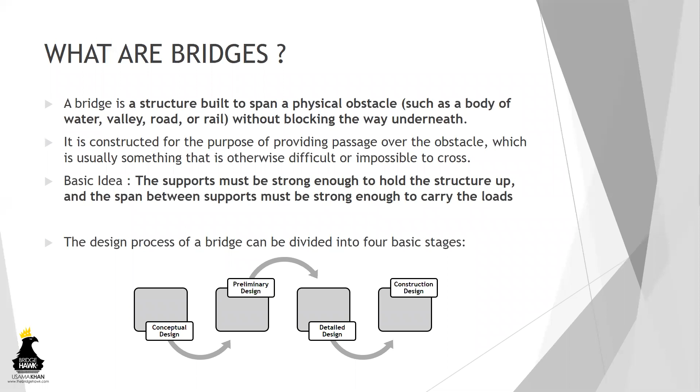So moving forward, we have different types of bridges. It depends upon the client what type of bridge or what type of structure is required—maybe some projects might have an aesthetic appeal, and some of them might not. So based on what the problem statement is or what sort of problem is supposed to be solved, the bridge type is decided, and this is completely decided by the client or the government authority, whoever is in charge of the project. So these are a few types of bridges.

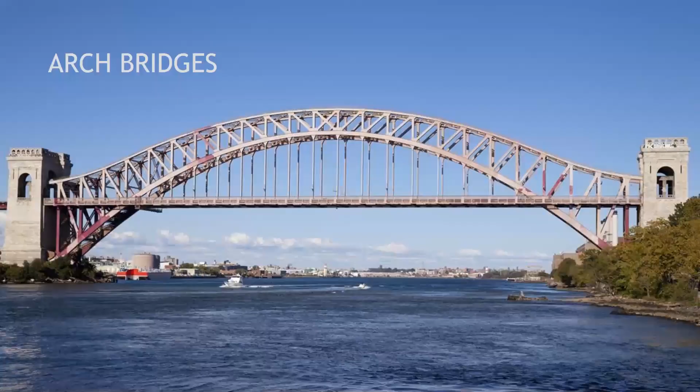We've got balanced cantilever bridges, trunnion bridges, which will open for the passage of boats below. We also have tied arch bridges, which is based on the principle of an arch which is stressed. We've got arch bridges in a similar way, made up of a steel truss with anchors at both ends.

Extradosed bridges, which are somewhat similar to cable stayed bridges, but the only thing is that the pylon is not as long as cable stayed bridges. The girder is mostly a part of the structure; the pylon is mostly a part of the girder. Masonry bridges, which are obsolete now. Steel truss bridges.

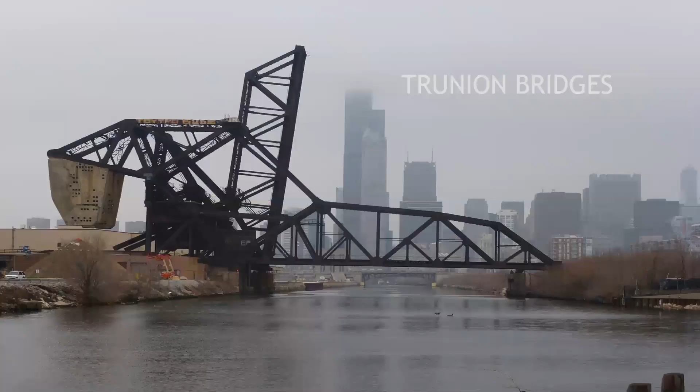Trunnion bridges - this is a rather unique style and design of a bridge. Over here, you can see the counterweight. So the basic principle is that you bring the CG of the bridge from here to over here. So when we do this, the bridge will lift up. I think even this is no more in use - it's also obsolete.

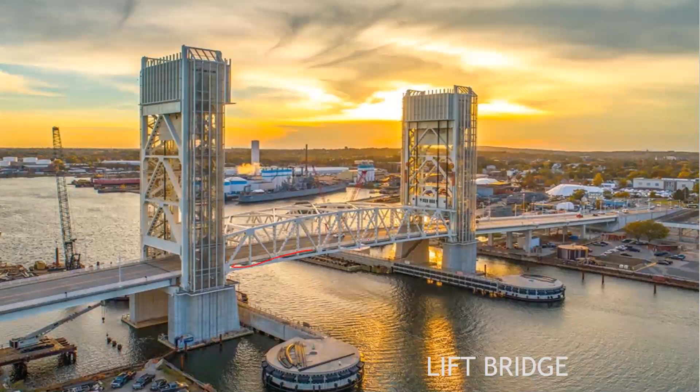A special kind of bridge with mechanical augmentation, like a lift bridge. It will basically lift up the central span. Over here is the machine assembly.

And finally, we'll come to the beam bridge. For a larger part of my webinar, I'll be speaking upon beam bridges. Why? Because this is one of the most common types of bridges and the easiest to install. Especially in an urban environment, it is highly preferred that the traffic is not stopped, and we have an easy installation of the bridge and a successful launch of the girder.

All right, so beam bridges are the simplest and most inexpensive kind of bridge. And as the name suggests, it is a simply supported beam. We've all designed simply supported beams in our RCC subjects in engineering. So basically the force is going to create compression on top and tension at the bottom. In the same way, we'll have to design tendons and make the beam resist tension on this principle.

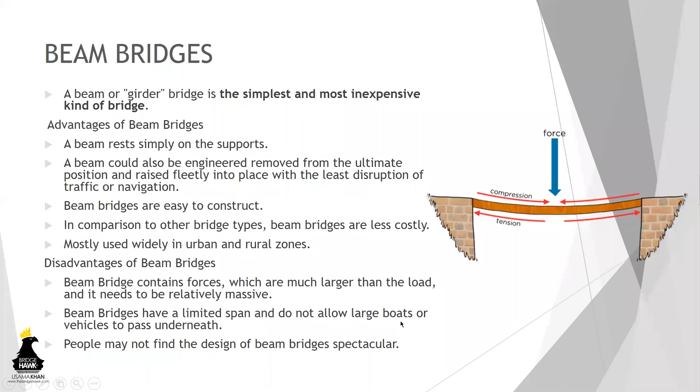So basically these are very easy to construct and they're widely used in urban and rural zones. The only disadvantage is that when we have large spans, if the span is too long, the depth of the beam might be higher. In that case, maybe you'll have to go for a different kind of girder. And people might not find this beam to be very aesthetically spectacular - it looks quite mundane, if I may. Something like this.

So now coming to our main topic, metros. So what are metros? Basically they're called MRTs, which is urban mass rapid transit systems. These are elevated railway transit systems with the tracks supported above the street level on a viaduct superstructure or any other elevated structure.

So the materials used to make these viaducts are usually either steel, concrete, prefabricated members, post-tension concrete, or a mixture of more than one material. Maybe the girder might be of steel and the deck slab would be concrete. In most cases, if you are using a steel I-section plate girder, you'll have a concrete deck. So in that way, this would become a composite bridge - this would be categorized as a composite bridge. In our further slides, we've got some design philosophy which will deal with composite bridges also.

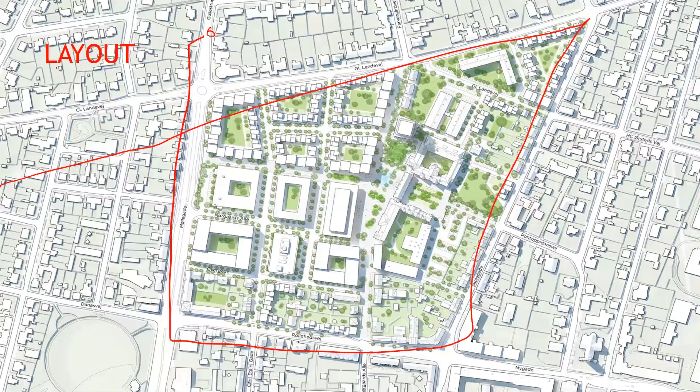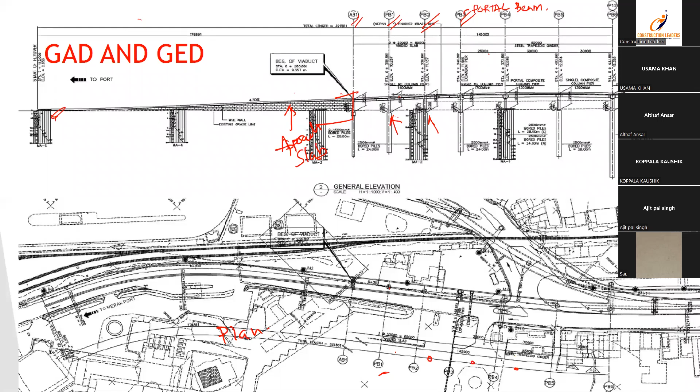So over here, what we see is that between pier PB3 and PB4, you've got a distance of 25,000 millimeters. Over here, we've got 30,000 millimeters of distance. Similarly, over here, we've got 3,000. This is showing the direction of exactly where it is going.

So in order for us to understand exactly what sort of foundation we should use for these piers, we should have a very resolved idea of what is the ground condition. What does the ground look like? What is the safe bearing capacity? Where is the water table? Where is the rock? So these details need to be at hand.

The most important thing in determining this is exactly what is the safe bearing capacity of the soil and what is the rock. For example, if we've got a rock starting directly over here, and this is the ground level, we can think of having an open foundation. But if the rock is well below and this is all sandy gravel, we'll have to go for a pile foundation, and even maybe have inclined piles.

Okay, so over here you can see this is a layout, the general layout of the project in a city. So as I said, the type of bridge, the type of pier, the type of girder, everything has to be specified by the client.

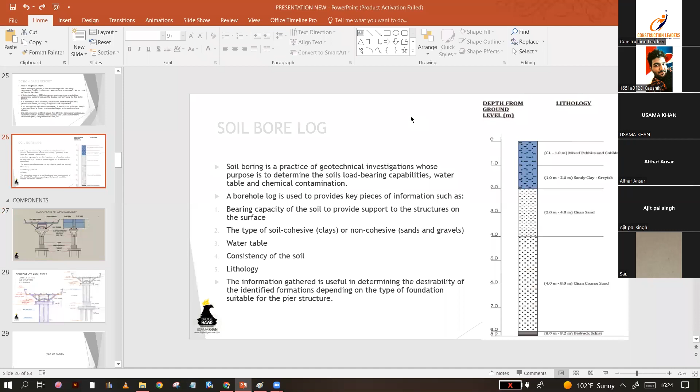So what this basically tells us, for example, if this is a bore log for location PB3, I've taken it from over here, let us say this location. As of now, we are trying to design this pier, so we need to know the exact conditions below it.

So what we'll do is go to the soil bore log. Basically, this log tells us that just below PB3, the ground up till 1 meter is mixed pebbles. After that, for another 1 meter, we have sandy clay. Then for 2 more meters, we have clean sand, and below that it is all coarse sand.

This gives us an idea of what the safe bearing capacity would be. There will be many columns, but one of them would be SBC, telling us what is the SBC and what is the design SBC. They might tell us, for example, at this location use SBC 250. This would be a third party concern.

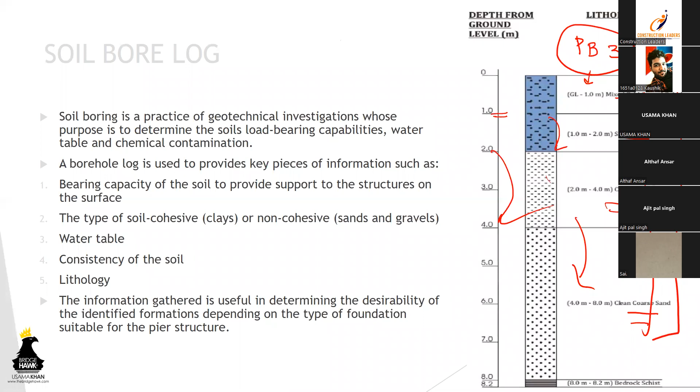We as structural engineers are not required to go into lithology. This will be done by a third party and given to us directly. This enables us to design foundations, and even for an open foundation it is very important. SBC helps us understand the strength of the soil below, the bearing capacity of the soil.

Moving further, this is a typical sketch, or typical elevation, of what a metro viaduct looks like, with different parts indicated. This is the transverse side, this is the transverse section, and this is the longitudinal section. Over here, what we have used is a multi-celled box girder.

This has actually been taken from a live project, so for obvious reasons I cannot share the drawing with you, so I've made a sketch instead. Coming from bottom to top, we have used pile foundations. In order for the load to be distributed properly, we'll have to use a pile cap. Just below the piers, we'll have a crash barrier.

What is the role of the crash barrier? Excuse me sir, good evening sir. Is this the better option, this multiple box girder versus single cell? Which is more, because normally in construction it is said that a single cell is more compatible and easier to construct, so that is just right, kindly.

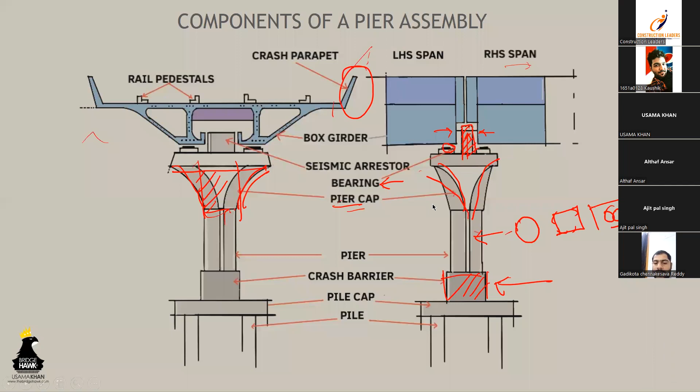This is the box girder, multi-cell. This is the left-hand side span and the right-hand side span. These are crash barriers or crash parapets. These are rail pedestals. In a moment, I'll also show you a 3D model so that it will be much more clear.

This is a bit more detailed sketch. One of the main concerns of a designer, when he's trying to design or transfer the forces to the bottommost part of this structural arrangement, is that he needs to know what are the different levels. So over here, I've marked all the important levels that you need to consider, and I'll let you know why these levels are important.

If you can see over here, this is clear, right? This is the top of pier. As I told you in the previous slide, the pier stops here - this is the pier cap, so this is the top of pier level. This is the centroid of the pier cap, you need to know this. Top of pier cap, top of the pedestal, and top of bearing.

Centroid of the girder - what is the level of the centroid of the girder? Because if you've got any moment, it is actually rotating about this centroid. Top of deck, top of rail - what is the rail? This is the rail upon which the axle load is going to be directly incident, so you need to know exactly what this level is.

And the center of bogie - bogie is the metro, you can say metro rail. So what is the centroid of this bogie? Apart from that, some of the other levels is like centroid of the vehicle. Why do we need a centroid of the vehicle?

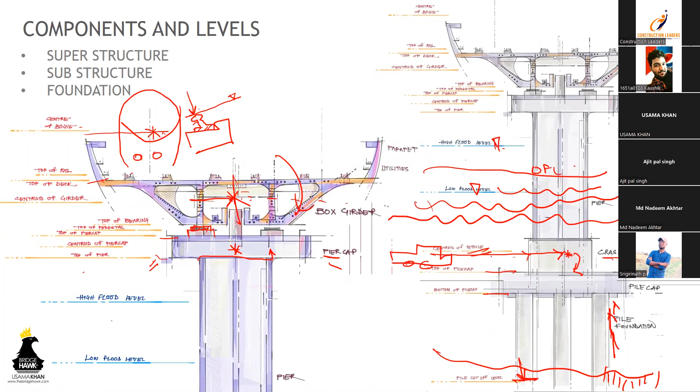If your structure happens to be in the vicinity of a water body, or it is assumed that in this zone there is a threat of excess rain, or it is anticipated that it is going to experience waterlogging, or there is a river beside it, then it is important to know the low flood level, the high flood level, and the ordinary flood level. But if you're designing structures which are not threatened by water, you don't need to consider this. We can have a dry analysis and don't have to consider a wet condition.

All right, so I'll show you a 3D model of a pier. This is a model that I created in Shapr3D. This very much indicates everything that you can have in a typical pier.

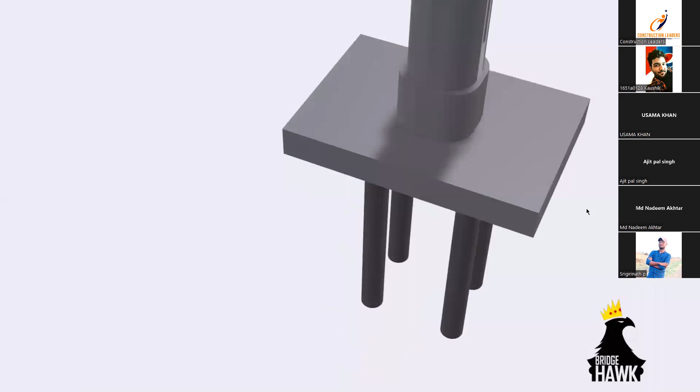As we just saw, the arrangement comprises piles, pile cap, crash barriers, and the pier cap. This is the pile and the pile cap. Coming up, it is a crash barrier. As of now, this is a circular section for the pier. Then the pier cap, and above it is the assembly for bearing. The red member that you see over there is the seismic arrestor. The holes that you see over there are holes for sleeves. These four holes are sleeves which are given in order for the launcher to fix itself.

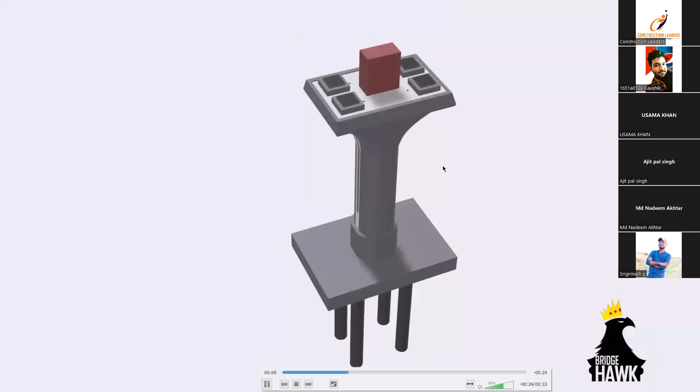So we can have different pier sections. As I said, it is completely the requirement of the client as to what type of pier he wants. In this site, the pier assembly that you see...

These are the piers that were typically used in many parts of Mumbai Metro and Pune Metro. If you see over here, this is a pier, the crash barrier, and a post-tension pier cap. Over here are the cables, if you can see - I'll show you in a moment. And these are U girders.

And we can have any number of variations, and we can have different shapes for piers, as long as you can structurally prove it, as long as you can structurally validate it.

So this pier over here - what you see is that the pier has been casted and the reinforcement has been left in order for this precast pier cap to be fixed upon it. So if you see over here, the pier is a separate entity. It has not been monolithically constructed. The bars have been left in order to achieve fixity between the pier cap and the pier. So this is the 3D model of the pier, and later on the pier cap has been lifted and simply placed upon it.

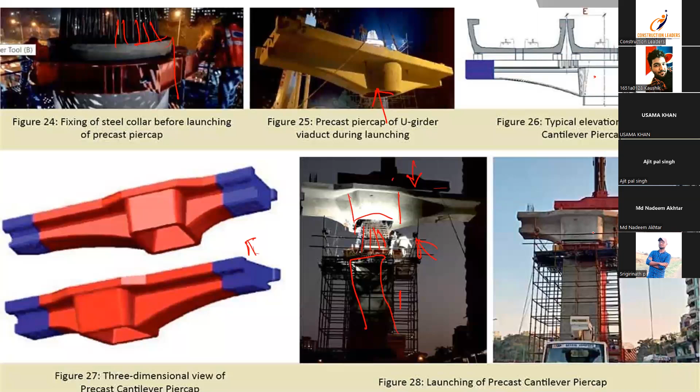So this is rather a unique case that we had encountered in Mumbai Metro and Pune Metro as well. What you see in front of me is a rather simplified sketch of what we did. We have two different types of girders - one is a box girder on the right-hand side, another is a batch of concrete I-section girders. They are both hosted upon the same pier cap, and this is a cantilever pier cap. By cantilever, I mean this portion is rather elongated, like it is under cantilever behavior. We've got different types of piers - RCC piers, piers with post-tension pier cap, hammerhead piers, cantilever piers, something like this, portal piers - I'll show you what that is - and coming down with station piers.

So basically, while we were designing this, I'll show you what we encountered as a challenge. If you see over here, this is a sketch that indicates a post-tension pier cap. I've taken a longitudinal section for this. Over here is the pier zone, indicated by the dotted line. After here, this zone is the cantilever zone, and as you saw over here, these two bearings, they are holding a box girder.

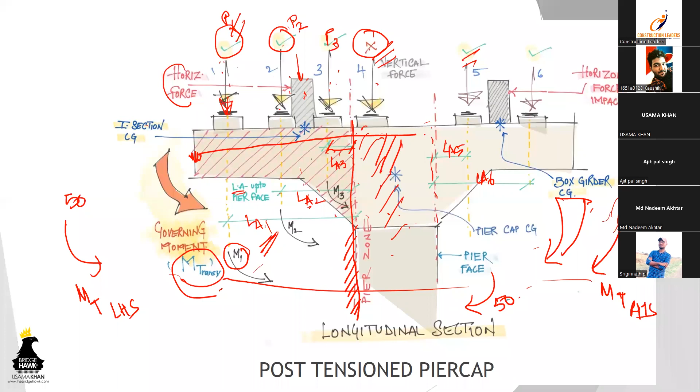So this is only the force. You can say it's sort of a force diagram, but since this is a cantilever pier cap, the extents of these are too long. So for that, we'll need to design it as a post-tensioned pier cap.

So this is the same pier cap. This is the stress arrangement, cable arrangement. If you see, what this typically is, is these are the cables for post-tensioning. These are the anchorages, I've just indicated them this way. These are the distances from the top.

You can say if I've taken a section from over here, or if I see this pier cap from over here, I'll look into this diagram. So talking about the profile first.

So this is the cable profile. If you see over here, we'll have a rather straight profile, and over here we'll have a parabolic curve. This is basically done in order to take care of the moment that is going to be generated.

That is why the eccentricity at the center point is more, over here it is less.

This would be the combined CG of the strands, all the strands. We've got many strands. Like for example, if you look at this diagram, we've got about 10 strands with an addition of 2. So what this typically means is the stages of stressing.

When we are stressing any structural member, it has to be done in stages. Why we use these kinds of construction stages, I'll discuss this when we are actually dealing with some detailed design.

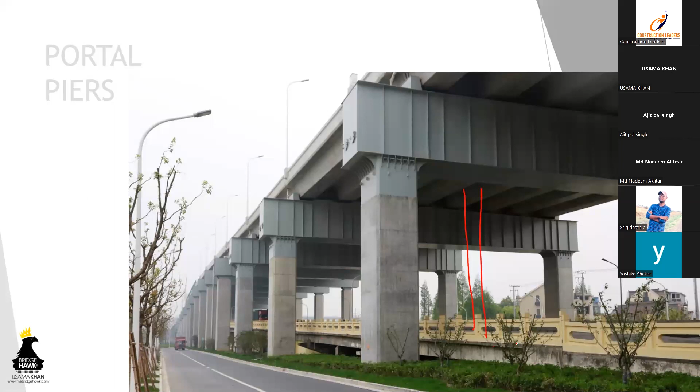Moving further, these are portal piers. We've encountered these a lot, and basically we use them when the distance between piers is not feasible for us to have a direct pier, because there's a different bridge here, so we have a limitation that we cannot have a direct pier. Hence we'll have a portal frame, typically a frame like this, and the girder would be over here.

And we can have different variations. For example, this is pier 1 and this is pier 2. You can have a variation like this, where pier 1 is deeper and pier 2 is much lighter, maybe because the rock is like this or something like that. We can have pile foundations for this pier, open foundation for this one, as well as a combination of girders. Over here we can have box girder, over here I-section girders, and we can have more than one box girder.

So it typically is based upon the layout and what is your requirement.

This is a sketch briefly indicating the different components of a portal pier. If you see over here, these are different sections. What is the section of the portal beam? If you cut it over here, you'll get a section like this - it's like a T-beam. This is a corbel section, which is actually hosting the bearing and the seismic arrestor, and subsequently the superstructure, the box girder and the pier section.

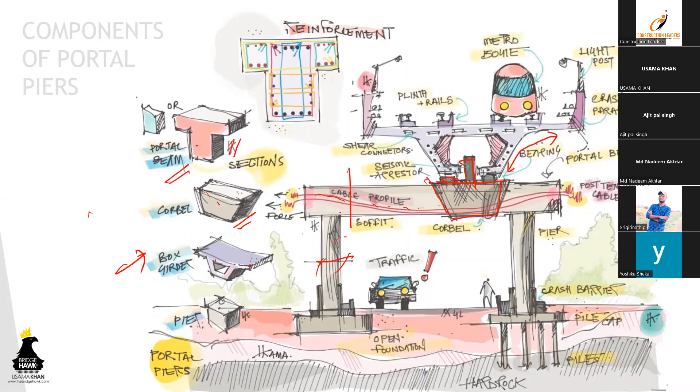Now coming to station piers, this is one of the most interesting elements of elevated metros. Why? Because the challenge exceeds a certain limit here, as station piers are supposed to have an aesthetic appeal, so an architectural consideration has to be made. Any station you've traveled through is comprised of many different piers - one station is supported by multiple piers. Maybe an entire station is supported by 8 station piers. When we designed Mumbai Metro, one station was supported on 10 different station piers.

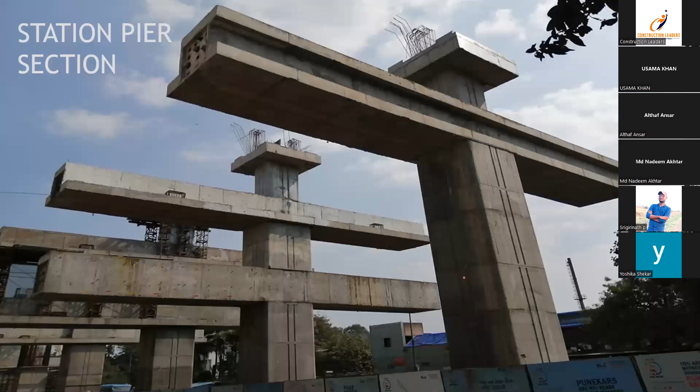So typically, this is your station pier. I'll show you the next slide. This is a station pier. These over here, what you see, are the concourse arms - these are cantilever arms which are stretching out from the pier. This is the pier, and this is the pier cap.

If you see over here, this just has got one level. Over here we've got number 1, number 2, and there's also one more level over here. So now, having seen this photo, it is easy for you to understand this pier in the context of the architectural drawing. So now this is your main pier, this being the first arm.

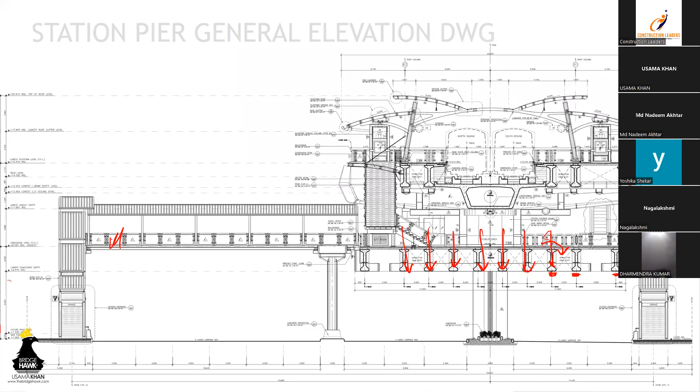These I-sections are placed upon bearings. All of these I-sections will be placed upon bearings. Whatever the moment and the loads, they are directly going to be transferred on the concourse arm by the bearing. So these are the bearings.

So now you've got point loads all on the bearings. As we had seen in the case of cantilever pier cap, with different lever arms, similarly we'll have different lever arms generating a higher magnitude of moment. The moment's lever arm will start from the face of the pier.

So we'll have different lever arms, like for example, we can say P1, P2, P3, and P4. Similarly, we'll have lever arm 4, 3, 2, and 1. So all of these point loads will generate a moment. This is level 1. On level 2, a similar case would follow. We'll have moments.

This would be an increasing magnitude, or it might also decrease. The lever arm is not the only concern, right? Of course, because if the lever arm is more, you'll have more moment.

But it is possible that the moment over here is 100, and it is possible that this would be 50. Why? Because it is not only a matter of lever arm - over here, maybe if we have some furniture or a machine like this, the SIDL load is more. So the point load itself is maybe 1000, and the lever arm is less.

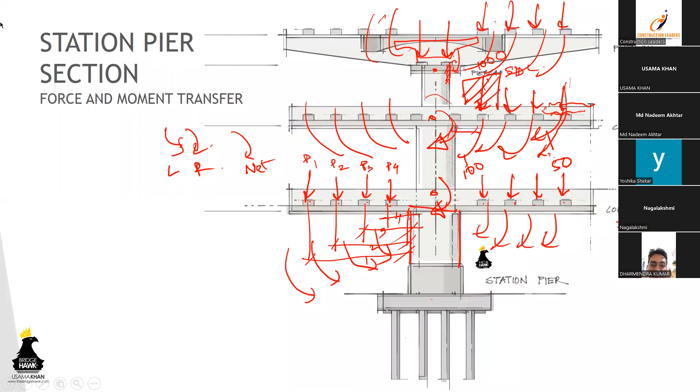So this is the design principle of pier caps—regardless of them being quite complicated, they're quite interesting. Having said this, if you see the number of components that actually define a station pier, there are too many, so all of them have to be designed separately. This entire pier has to be a separate design entity.

This is one design entity, this is the second design entity, the pier cap. The platform arm is a separate design entity. The concourse arm is a separate design entity. The second concourse arm is a separate design entity. The crash barrier, of course, is a separate design entity. The pile cap and the foundation is a separate design entity. All the bearing pedestals are a separate design entity.

It is possible that we'll just design one and apply this for the most critical case, and apply the same design for all of them. The bearing, of course, is a separate entity. The seismic arrestor is a separate entity. So you can see that there are too many design components that actually go into creating the actual submission for a design for a station pier.

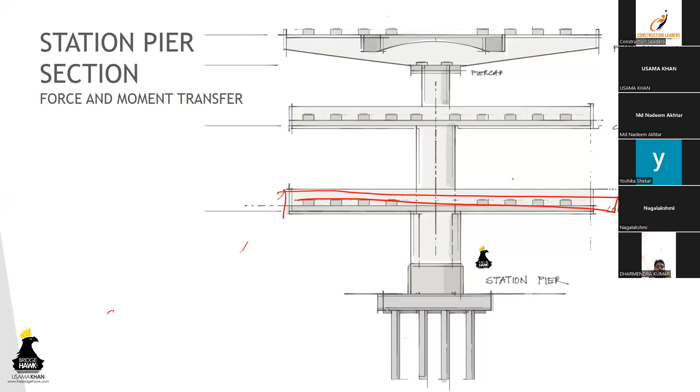This is the moment. As also, if you would observe something—over here, if you see, there is a section like an inverted T-beam, and we have got bearings on this side as well as on this side. So both of the sides have got bearings.

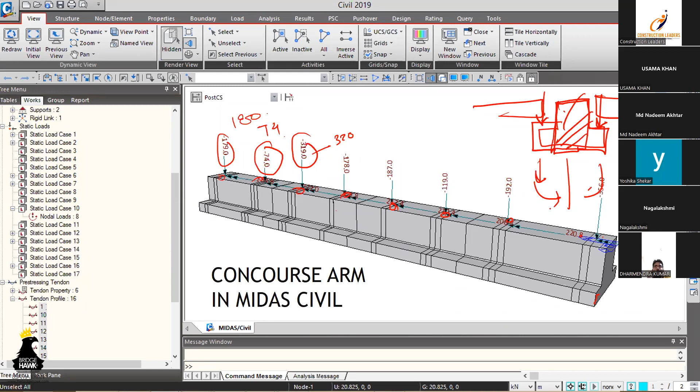So basically we're talking about something like a corbel. This is a rectangular beam, treated as a rectangular beam with protruding cantilevers. The point load is incident on both sides, because we've got a girder on this side and a girder on this side. So using the same principle, we use the net moment and design for it—that's why it's been resolved into the center point. It's just a simple 2D model to which I have assigned the section of an inverted T-beam.

This is a concourse arm, and as you saw in the previous slides, these are post-tension cables over here. These cables have to be represented in the software model. So this is the cable profile, and as you can see at the center, the eccentricity is more. This is the cable anchorage block, which you saw in the picture.

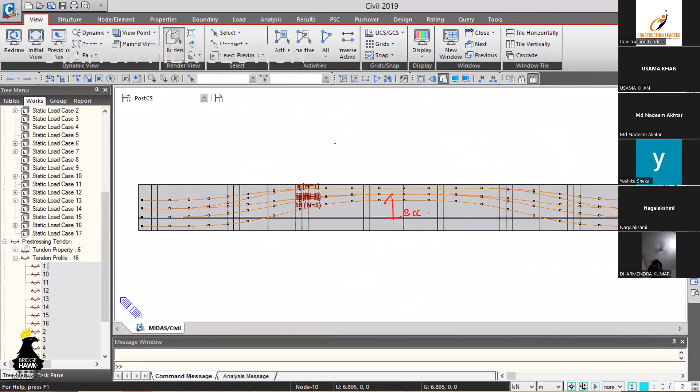There's an interesting procedure to this—if we resolve this into X and Y axis, and the Z axis, for now I'm taking Z as this. So what you've got to do is, all these points that you see are the curve points. We are defining an array of points—rather, we define only half of it and then mirror it. All these points have a different coordinate in X, Y, and Z. So every single point, when we're defining a strand, has to have an X, Y, and Z coordinate. And when we have this, we have an inbuilt command for defining strands. So once we put all those coordinates and mirror it, we can have it this way.

All right, so this was about concrete concourse arms. If you are interested in this, we can have a separate session on the design of these amazing cantilever members.

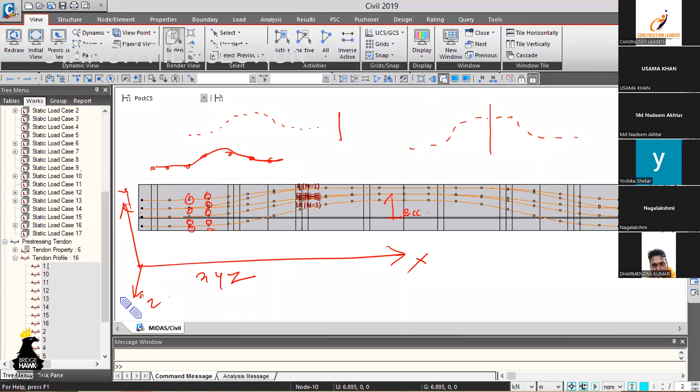Moving on, bridge girders. What are the types of girders that we actually encounter? We've got I-section girders, box girders, single-celled and multi-celled, U-girders, steel plate girders, truss girders, and composite girders. We'll be dealing more with the box girders and I-section girders.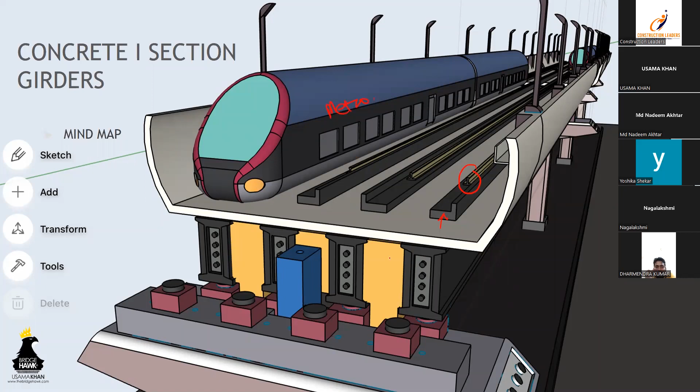This is the model that I made, representing a complete structural arrangement. These are the rail plinths, the rails, the metro bogie, and these are concrete I-section girders. And the bearings, the bearing pedestals, the sleeves, and of course, the post-tension cables. We also see a hole over here, that is for drainage purpose.

We'll have a slight cross slope to this deck, so whenever we've got rain or any other discharge, it will directly go over here to a pipe, and the pipe goes way beyond, way below, from inside the pier.

So typically this is a typical I-section girder. This is most common, as we have discussed. Most common, can be placed by a crane, very easy to construct. It can be constructed on the site or in the warehouse and brought via a truck.

This is a cable anchorage block arrangement. You see over here, these things are actually cable anchorage blocks. These are 7-wire strands - one strand is comprised of 7 wires. This is useful in stressing.

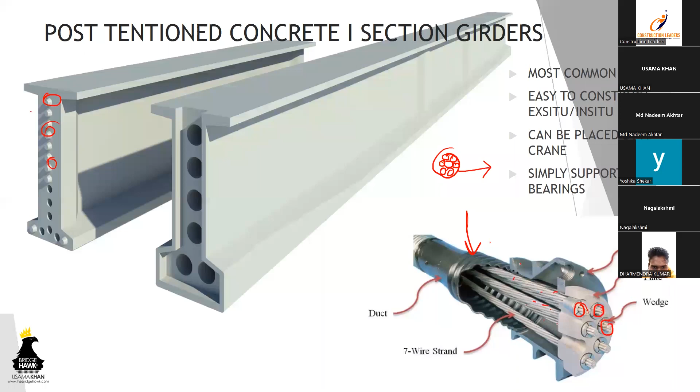Coming to the next type of girder, which are box girders. I'll show you a 3D model for a box girder. This is a model that I made in Revit.

This is typically a multi-celled box girder. You can see the level of detail, and you can see what are the different components that comprise a box girder member. There are three different cells to the girder, and the protrusions that you see over here, these are the shear keys. When two different pieces or segments are placed and joined, shear keys will prevent the horizontal or lateral displacement between the two pieces.

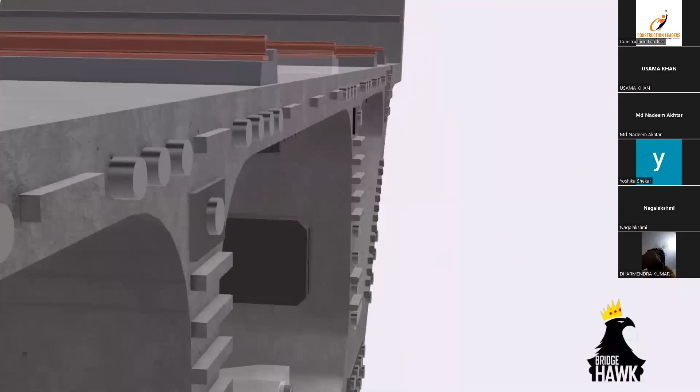I don't know why it is so distorted. All right, the notch that you see over here is supposed to accommodate the seismic arrestor - more on that when we talk about loads. And this over here is the blister.

It is a bit distorted. These are rail plinths, and these are the rails. How we take the loads, I'll discuss in the load section.

So this was the model that we saw. Talking about the different components of a box girder, if you see over here, I've only taken half of the box girder. This we saw over here, this was the rail plinth, the rails upon which the bogie is going to come. These were the blisters. Over here is the anchorage block.

These are different cable anchorage blocks. Over here, the shear keys. Again, these are the main cables. The blister, the box girder, the web of which is resting upon the bearing.

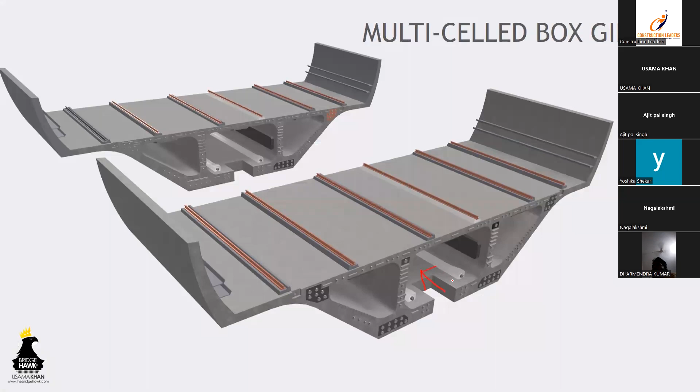Also, this part is called the top flange, and this is the bottom flange. This is the internal web. These are the diaphragms. And this, as I told you, this is a seismic arrestor. The seismic arrestor basically comes over here in the notch.

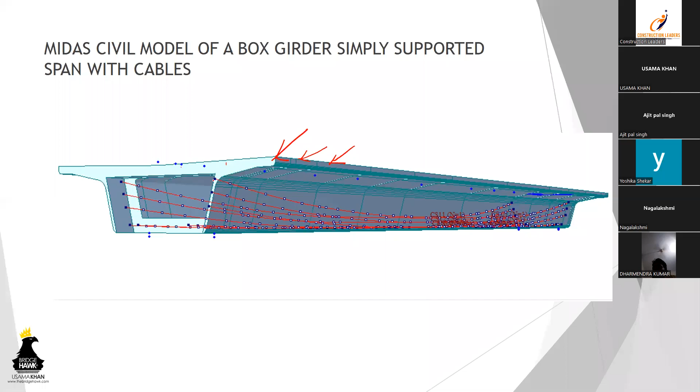More on that if we have a detailed lecture on design of box girders. This is a typical box girder formwork. Usually what happens is the box girder gets casted on a yard and then it gets brought up to the site.

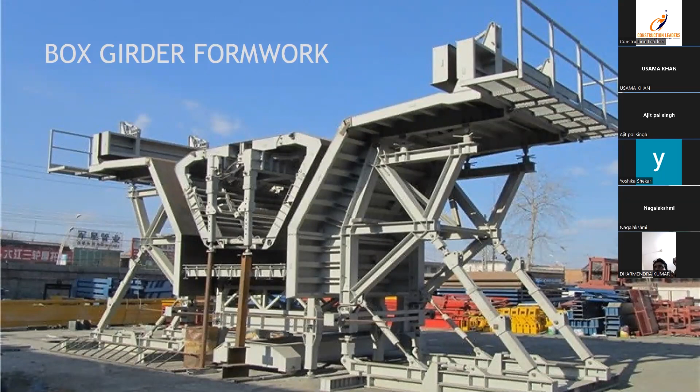I'll show you a video, so that would help you understand it better.

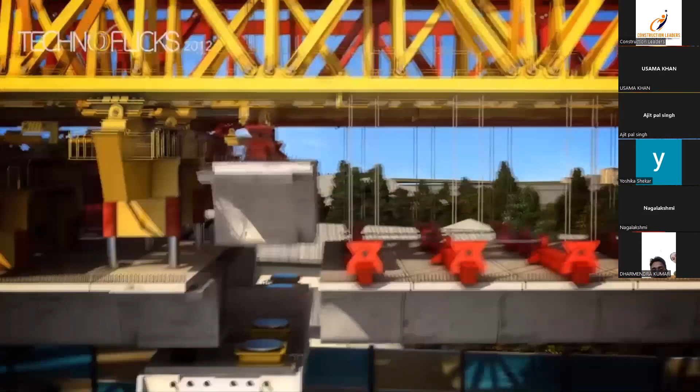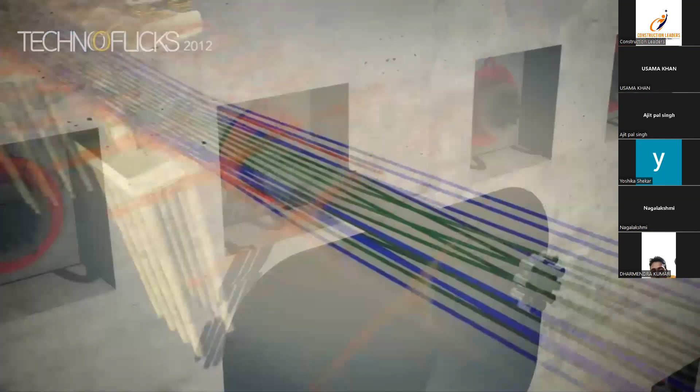So that was segmental launching. As I told you, when we are considering design, we need to simulate every condition that a structural member can experience. Segmental launching involves the crossing over, or passing over, of a very, very big machine. This launcher carries huge loads.

The loads from these launchers have to be represented by means of a load case. If you can see over here, the entire load is directed on these three legs - you can say the front support leg - and there's a separate launcher case which is highly critical when we are designing pier caps.

When a launcher is at this stage - let's say I name this stage as stage 1 - at this stage the launcher only represents its own dead load. There are no external loads to it, but at this stage it also represents the dead load of the entire span. So this launcher load case has to be

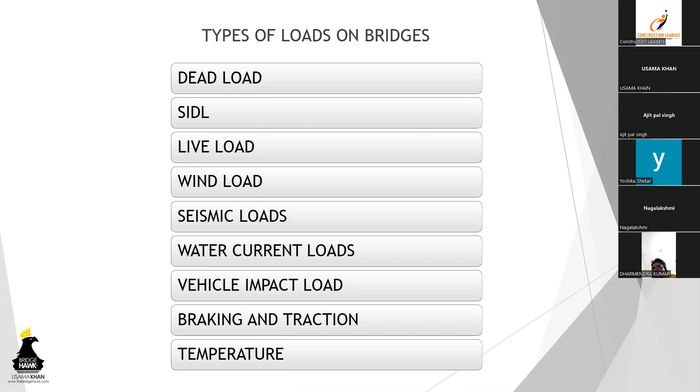So starting off with dead loads. Dead loads are basically the category of loads wherein the self-weight is to be multiplied and transferred to the substructure. So they are a permanent category of loads. They have to endure this for the entirety of their service life.

The self-weight of the structure is usually calculated by the software which you are using. If you want to be sure of your results, you can also have a manual calculation done simultaneously.

It is not always the case that you'll have equal spans on both sides. If you see the sketch, you have span 1 which is 20 meters and span 2 which is 30 meters. So obviously the loads - if this is the top view, let us assume we've got 4 bearings - if it is 100, maybe this is 50 and this is 50 from the right hand side. And when this is 50, then it will be 25 and 25. So depending upon the spans on either side, right hand side and left hand side, you will have the dead load values changing every time.

So it depends mainly upon the type, number and section geometry of the girders, span length. As I said, type - you can have a case wherein over here we've got I-section girders and over here we've got box girders. So even if you have such an arrangement, maybe you've got 4 or 5 I-section girders, and over here just one single box girder. So even if this is 20 meters, maybe this will have more load - maybe 500, or maybe only 200. So it is not only about the span, it is also about the type of girders, the number, and the section geometry.

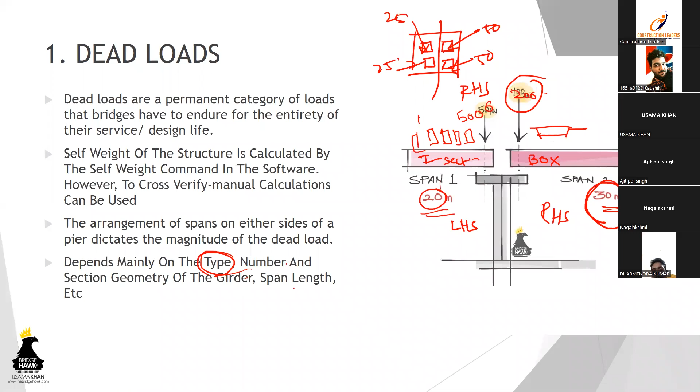Superimposed dead loads - as I said, the DBR, the design basis report, has to specify what is the superimposed dead load incident upon the span. That includes long welded rail pads, fasteners, parapet wall, OHE masts, like in one of the models you saw which had street lights, solar panels if we have a provision for them, cable trays, plinth loading, and others. This has to be specified by the DBR.

So this is a typical picture - this is one of the Dubai Metro stations. If you see on the track, it is not only a plain deck. Over here we've got rails, plinths, some utilities, and some railings. If we've got a street light over here, it has to be represented as a load. And if you've got conduits like this running, you have to have all of them included in the SIDL load case.

So this is the long welded rail - the railway. For example, if you have a case where this is track 1 and this is track 2, but over here you've got a merging track, the concrete plinth which is going has to merge into a second track. So how will you take the SIDL load case for that?

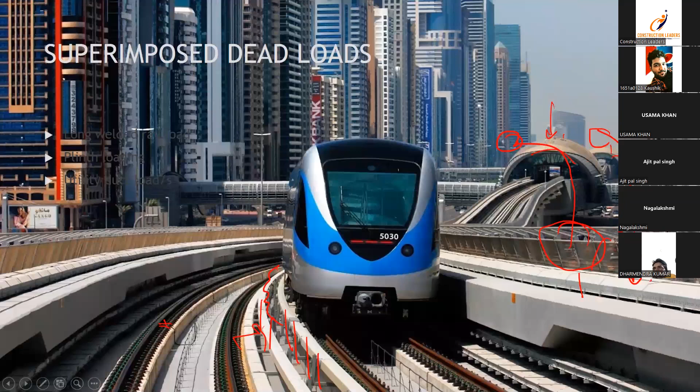This is a representation of that - the red block indicates a curved track, and the gray block indicates a straight track. So when it is merging like this, at one point, at the midpoint, you can say it will almost be like one single plinth.

Why I'm showing you this is because if you have to simulate exact conditions, you need to know, for example, if one single block weighs 10 kilonewtons, just as an example. Over here we've got only the dead loads, which is 10 plus 10, but at this juncture we have only got 10. Maybe it will have some extension, so maybe it will be 12, not 20. This has to be represented. We cannot risk having excess loads without any reason, so because we need a proper simulation, this should be simulated.

So over here, if you see, there's one protruding element. Over here it is not. So maybe over here it is 10, but maybe it is only 7 over here. It depends upon what level of detail you want in your model.

All right, so live loads. Live loads are basically the bogie loads or the axle loads that must be specified by the DBR. The design basis should also tell you what is the axle load, what is the loading that you have to be designing the structure for. Over here, this is a typical metro bogie that I've indicated. These are the axle loads, 16 ton per axle. So in the top view, one of the wheels is 8 tons, the other wheel is exerting a load of 8 tons. All these tonnage values have to be specified by the DBR.

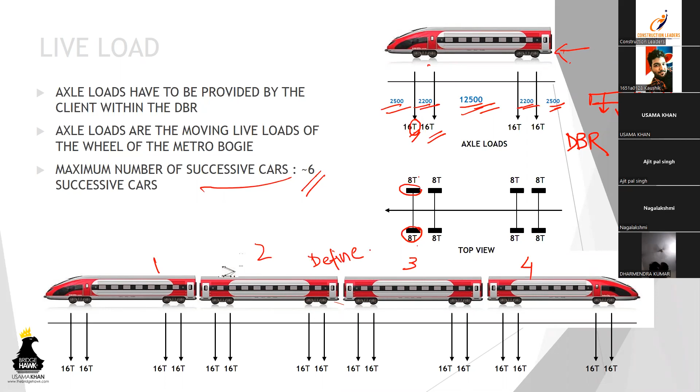All right, I'll show you a small animation of live loads. This is a typical elevation for a pier and span arrangement, girder arrangement. This is span 1, this is span 2, and we are assuming we have got only 2 tracks. When we have got only 2 tracks, what are the possible number of variations of live load that we should consider? Over here I've mentioned 8 tons, but this is only for one side, so it is actually 16 tons per axle.

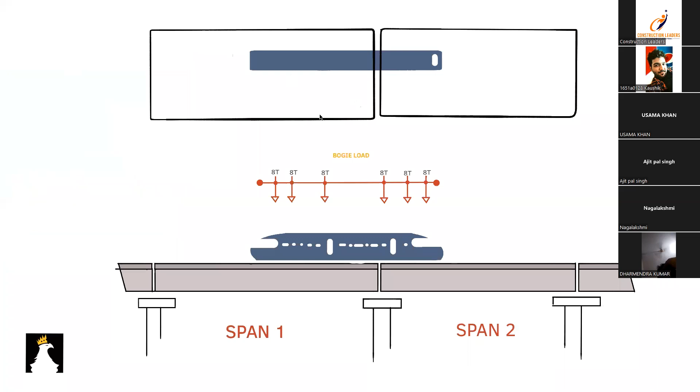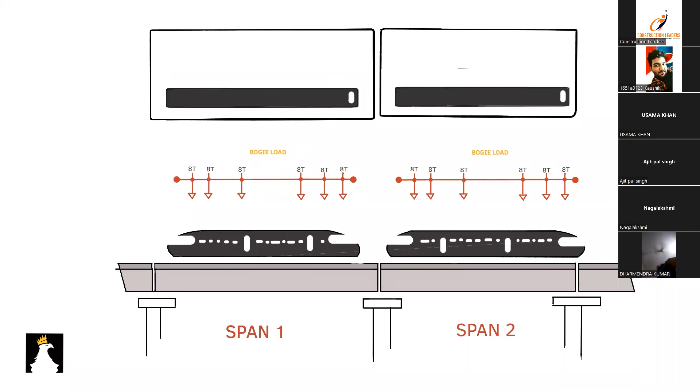So this is the case wherein only a single live load is moving over the span, a train moving on the left-hand side track. This is a case wherein a train is moving on this part of the span, only a single train. Now this is a case wherein 2 trains at the same time are running on the track, but now they have stopped on the left-hand side span, span 1. This is a case wherein 2 trains have consecutively passed, but they are on the same side of the spans. And now this is the final case wherein both the tracks and both sides have been loaded.

So these conditions have to be properly simulated.

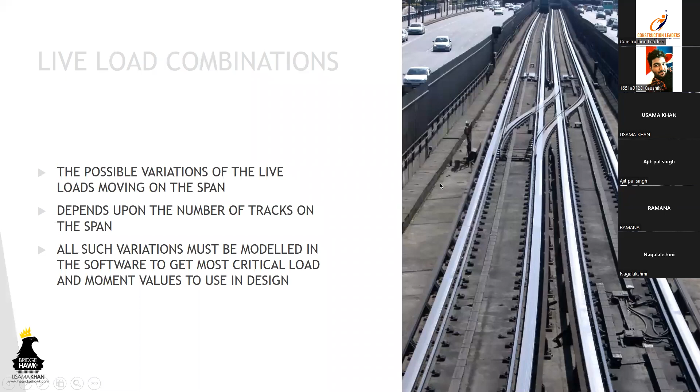Moving on, you need to create possible combinations of live load. For example, if you see this image, you will realize there are only 2 tracks, track 1 and track 2, but there's also a merger of track, there's also a merging track. This gives rise to a number of variations that the span could possibly experience in its service life. This was actually a span which I designed for North Mumbai Metro, and this was the number of tracks that I experienced. This is a trapezoidal span.

On the trapezoidal span, we had 3 straight spans, track 1, 2, and 3, but we've also got mergers, this is track 4 and 5. So now you need to properly simulate and prepare as load cases all the different track conditions that could possibly be experienced by the span in its serviceable life. Having done that, these are the possible variations. We'll assume all of these are live load cases. You have to create all these live load cases in the model.

In my case, I did it on Midas Civil. So we are assuming that only a single train is going on the bridge span. This is case number 1, T1, single train on track 2, T2, similarly on track 3, T3, on track 4, and on track 5. So these are single train load cases.

For double train load cases, T1 and T2 at the same time, two trains are running on these tracks. Similarly, all these variations have to be taken into consideration. And the main case is 3 trains running at the same time, so track 1, 2, and 3 all occupied simultaneously. All these cases must be properly represented.

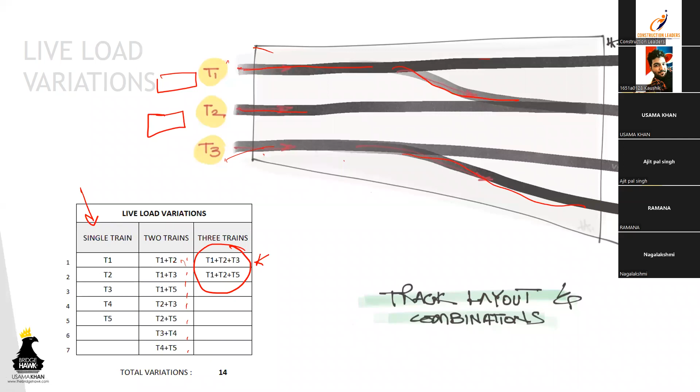So it makes up a total of 14 variations, which will possibly present us with the challenge of finding out what is the highest value of torsion, the shear, the reaction, and the bending moment values for which we should design different girder sections. Braking and traction load also.

When a vehicle is stopping on the track, it will exert a longitudinal force, and when a vehicle is starting off from its rest position, it will also exert a certain load. So it is taken as 20% of the live load.

Wind load - you'll have to refer to the wind load rose diagram of that area to get the exact value of the highest wind speed, and similarly you'll have to put the load on your structure. Okay, this we had discussed.

Finally, we have got earthquake loads. As I told you, seismic arresters are a unique member which is placed upon the pier. Basically, what the seismic arresters do is bear the impact of the transverse loads. Seismic arresters are responsible to bear the impact of transverse and longitudinal forces. Depending upon which direction of forces they are actually resisting, they are called transverse seismic arresters or longitudinal seismic arresters. Many times you can also have a seismic arrestor which is resisting earthquake loads in both directions.

It is doing the job of a longitudinal as well as a transverse seismic arrestor. So that would be called a transverse and longitudinal seismic arrestor. More on this.

I believe you remember the model that we had spoken about, that I showed you - that was a seismic arrestor. I'll show you one animation wherein it will be clear as to why exactly we are considering seismic arrestors.

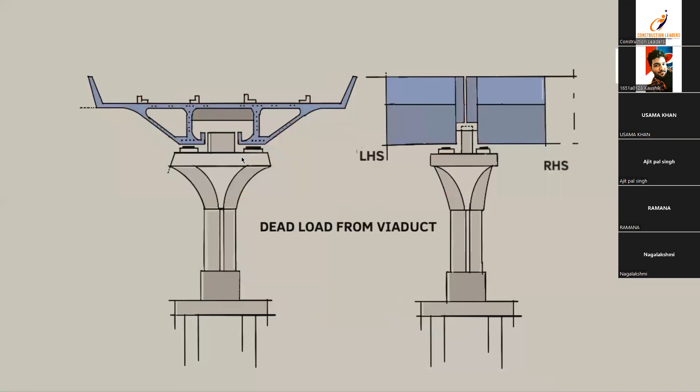This is a small animation for different forces on a pier. Dead load - we have studied about this. Self-weight coming from the top: the box girders, the pedestals, the pier cap, the pier, and the foundation.

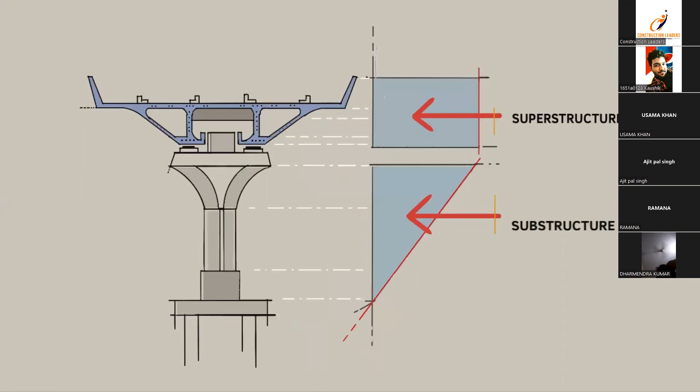This is the wind load diagram. Wind on the superstructure can be resolved into a uniformly acting force. The geometry has to ensure that most of it is deflected. Wind is also impacting upon the bogie.

Yes, this is the impact force. Why do we need crash barriers? This is why - because it is possible that a car might actually dash into it. So it is important to consider this load case.

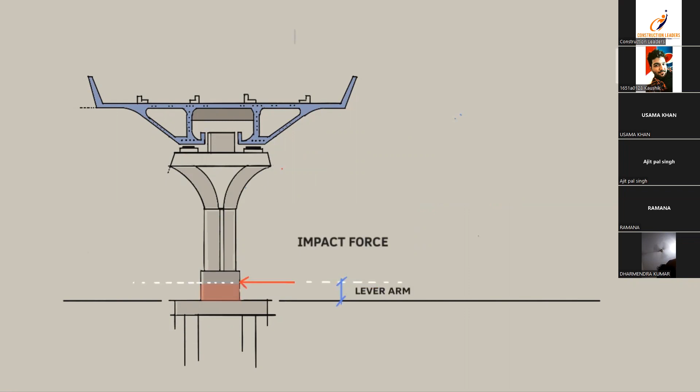Live loads we have seen, seismic loads now. If you see the sections, longitudinal and transverse, in between we have got the seismic arrestor. So the girder is actually trying to hit the seismic arrestor. I've over-exaggerated the condition - it would not be so high, it would be some mm maybe, but I've exaggerated it for you to better understand this.

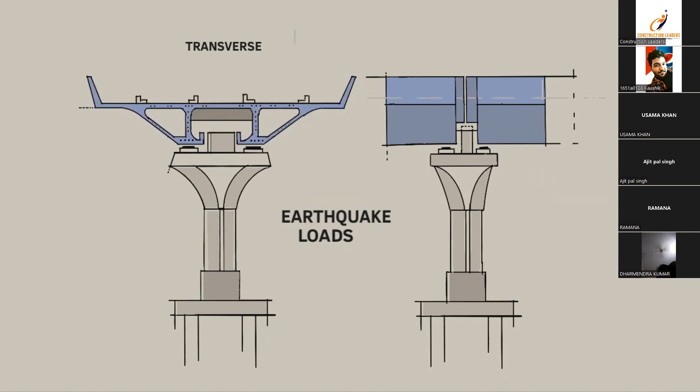Okay, this was the longitudinal impact. So if we have a seismic arrestor taking the longitudinal impact, it will be called a longitudinal arrestor. Similarly, for transverse, if it takes a transverse impact, it will be called a transverse arrestor. And if it does both, then it will be called a transverse as well as longitudinal arrestor. Water current loads also. So this is why we have seismic arrestors.

So when we are actually designing a seismic arrestor, this is a case for an arrestor being both transverse and longitudinal. This is a longitudinal force acting on the section, the height of which is 1500, the length is 2000, and the width is 700. So when we are talking about longitudinal design, this figure has to be taken into consideration. Over here, the member is 1500 long, but the point at which it is acting defines the shear span.

So this is your shear span, and this is your depth. In this case, when the force is acting over here, we'll resolve the structure from over this part. So in that case, we get 1500 as the length and 700 as the depth of the member. So naturally, it is supposed to be designed as a bending member or a corbel.

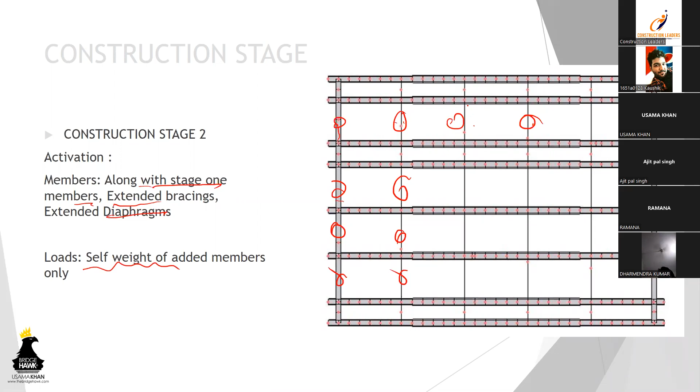But in the third stage, I'll have to activate everything. So now it depends upon you as to how many stages you want to go and as to the level of detail as to what you want. Okay, so in the third stage, I've activated the entire span.

If you see, these are I-section girders. As also, these are merging tracks, and these are the girders. And I've resolved them into different segments. This is only to have a detailed, or you can say a more finer result to my analysis.

So in this construction stage, I've activated all the geometry. I've activated all the stages, all the loads. So as I told you before, it can be coupled with different loadings. So over here, we are only talking about the dead load.

So we will have 3 different models, wherein like model number 1, 2, and 3. So either you go for a model which incorporates the conditions of the loading conditions of all the 3 cases, or you have a single model which incorporates all of them. So in my case, I went for different separately.

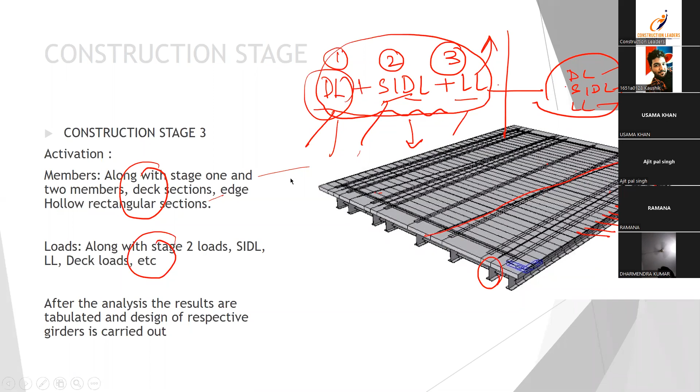So in my case, I had a different model for dead load, a different model for superimposed dead load, and for live load. What happens is it reduces the level of complexity in your model. One single model does not have to handle so many iterations, or you can say load cases. So I prefer to have different models for all of them separately. So this is the basic of this one. As I said, construction stage, you have to define it, you have to activate - what do we have to activate, and how we go about.

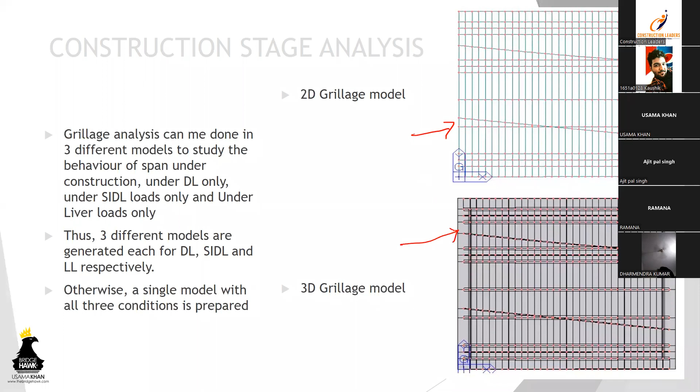So this is the line model, the 2D grillage model, and this is with the sections. And if you see over here...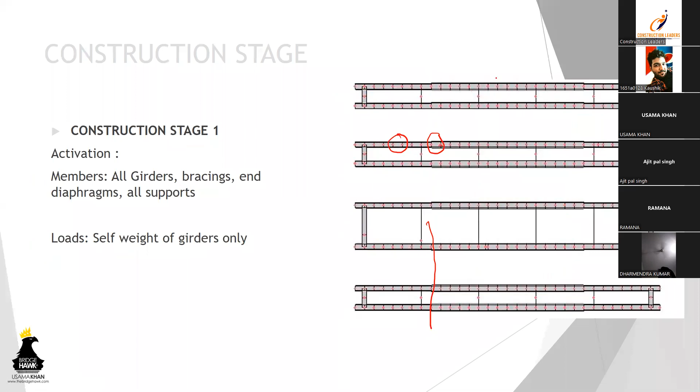After the bracing, after the splicing, the section is increasing. These sections are not as big as these ones. This is because we are at the center point, and since this is a simply supported one, we'll have a higher moment at this value, so we'll have a heavier section at this point.

More on this, I believe grillage analysis in itself is a very, very vast topic. So if we happen to have a session on grillage analysis, I'll go in great detail about how we choose a section, how we go about putting the loads, how we go about setting the construction stage and the loading. More on that when we have a separate session on grillage analysis.

So finally, the load combinations. How we go about load combinations is that the DBR has to specify what load combinations you need to take. Do you have to refer to a certain code, or do we have a separate guideline for this specific project? Typically they'll give you two or three combinations like serviceability and ultimate state, as well as to check the SBC. So these are the load factors.

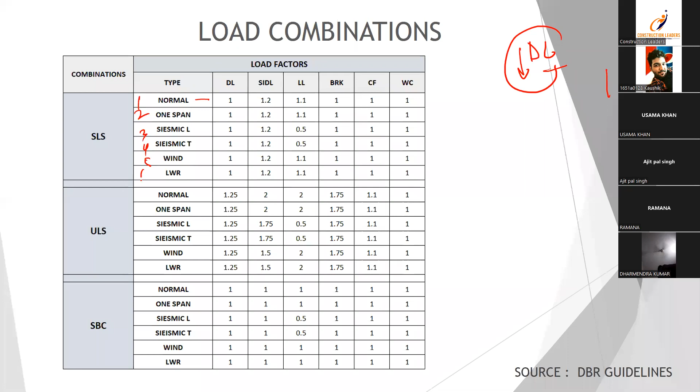Whatever load that you have, like for example, whatever load if you're designing a pier, you need to create a combination - this is combination 1, 2, 3, 4, 5, 6, whatever number of combinations. So maybe at the end this will give you a longitudinal moment of maybe 100, this might give you 50, 60, or 200. So whatever combination gives you a higher value, you'll take this and design your pier or whatever section you're designing.

So this SLS load case is usually used for checking the structure, and ULS is used usually for designing the reinforcement and other aspects.

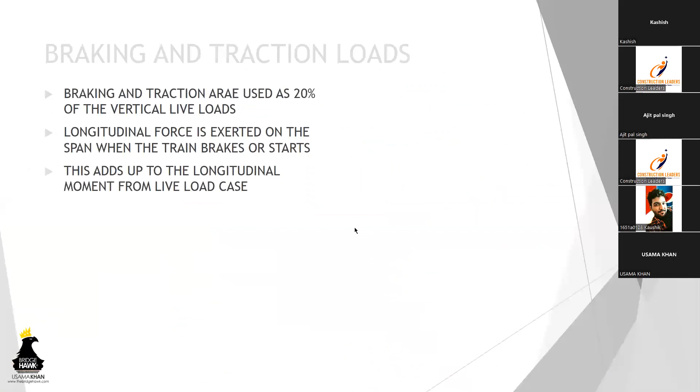So just imagine if you model the foundation, the substructure, as well as the superstructure, the model that you will get will be so complicated. It will have so many load cases. It will have to have so many coordinates for the tendon profile, the loads which are acting, the geometrical sections. You need to have a tremendous amount of input on that model.

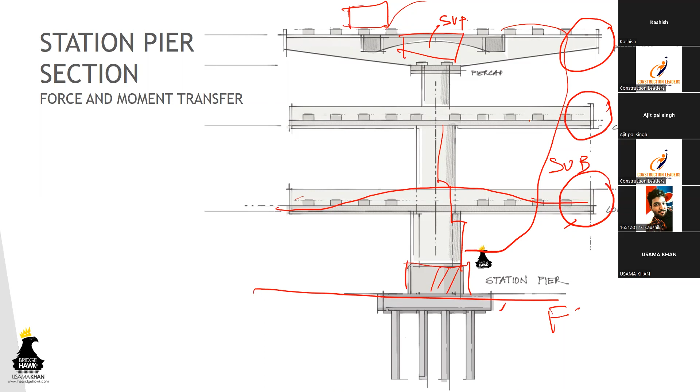And we don't want that because it is not even necessary. Why? Because, as I showed you, when we are modeling, for example, this is a concourse arm, it has been modeled separately. So if this is one station pier, my submission of design will be separate for this one, separate submission for this one, and a separate submission for this one. Why? Because the level of intricacy is very high, and we cannot risk having mistakes.

So it is preferable, and it is not going to affect your results in any way. Designing and modeling in separate software models is only going to ease and resolve your own results. It is not going to, even if you model it on a single software file—

it is going to create a lot of errors, because you need to be exactly sure of what is there, if there's any clash, if there is any error. So the level of error that you can have exceeds if you have a combined model. So it is usually not the practice. When you are modeling, you'll have a separate model for every single component.

Okay, the second question was, how do we know mathematically if the model is correct or not? Correct or not? Yes.

Okay, so as far as the model is concerned, the software is capable of telling you, okay, you have made a mistake over here. This is the first way of knowing, you can say this is your first line of defense. The second line of defense is reading the results, reading the numbers.

So just imagine, I'll give you an example. If I've got a beam like this, a simply supported beam—this is an I-girder which I'm modeling—and I've got, let's say, a bending moment diagram like this, and it is a simply supported beam. So when you are going to export your results, you'll get node 1, 2, 3, 4, 5, 6.

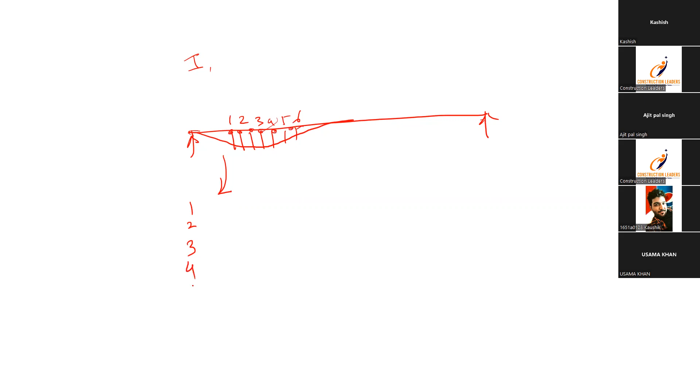These are node numbers, and if you get a result like say 10, 20, 30, then 20 and 10, immediately you can find out the difference, that it is wrong. Why? Because you know for a simply supported beam, it cannot be 0 over here. So unless you get a value like this, you can know that it is wrong. You can know easily that your numbers are indicative of the modeling that you have done.

So mathematically, if you want to ensure correctness, you need an exhaustive check. This is a problem that we face a lot while modeling. Usually, in Midas, or any of the software, when we have to define a member, it defines like this.

Okay, if you have to define a beam like this, it will be defined as, say, member X, between point 1 and 2. But if you want a result at this point, you'll have to define the same beam with 2 different nodes, 1 and 2, but there'll have to be another node, 3.

So when we are exporting your results, you need to be exactly sure as to the number of nodes that you have modeled and what is the concerned node that you want your results to be exported at. Like for example, if this is a bearing point, this is maybe node number 30, and this is node number 40.

So when you are exporting, you'll get thousands of nodes. You should know that at 30, even if over here we have got minus values of shear, over here you should have a sign change. So that is one way of knowing that your model is correct. That was your second line of defense.

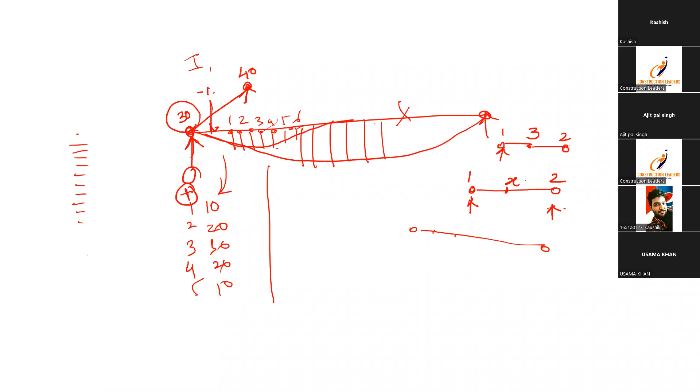The third is experience. If you keep on doing this, you will understand, okay, the results are somewhat suspicious. So maybe you'll have to go back to your results. And what was the third question? I seem to forget. What is the third question?

Sir, how to model seismic arrestor and assign loads to it? Okay, so basically seismic arrestor is not a very complicated entity. Seismic arrestor, as I said, it is either to be designed as a corbel or it is to be designed as a bending member. So this can be also done manually.

Seismic arrestors can be modeled manually. We don't need to have a software model for it, unless we have got some very extensive load cases coming upon it. Seismic arrestor, as you know, is just like a cantilever, small cantilever beam. It is like 1.5 meter. It is not too much. So we don't model it, as far as what I had done.

I had never modeled a seismic arrestor on a software, because, as I said, it is a transverse load. It is a horizontal load. We don't have any point loads coming on it directly. We have loads coming in the horizontal direction only. So they're not remarkable enough to be required to be modeled on software. Second of all, it does not have a complicated geometry. So this small seismic arrestor can be likened to a small beam. That's it, finished. It is just like a cantilever structure.

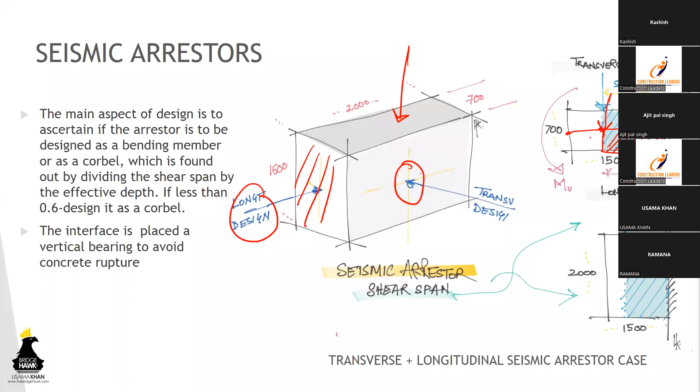Crash barrier specifications? No, not a specific specification. As you know, if your metro is passing by a highway, the highway speed is maybe 120 kilometers per hour. At the same time, the metro can be passing through a cramped locality wherein the speed limit is 70 kilometers per hour. So we cannot have different values.

So what the DBR usually does is specify only for this project. You cannot say that a project which has had a certain crash barrier in maybe Dubai Metro can have the same crash barrier in Mumbai Metro. No. So the DBR must specify, and the DDC, the detailed design consultant, will design the crash barrier once for the extreme condition. So if it is 120, maybe he will take 150 kilometers per hour load, and whatever moment is coming, he'll design the crash barrier for this high level of load, and it will apply for the entire project. That's it.

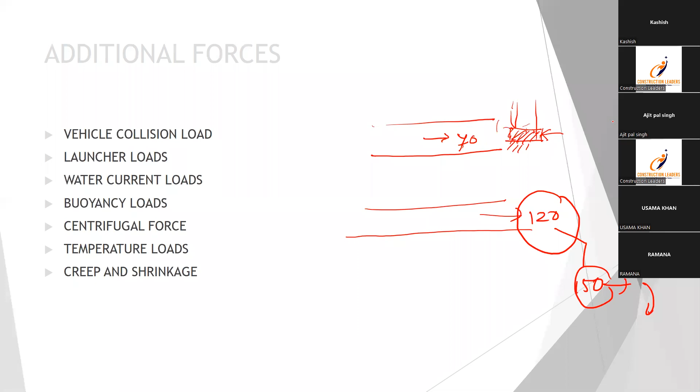Mr. Kashish, you can unmute and ask your question. Sir, I have a question. When we design for the girder, suppose we have taken M60 grade, what is the factor of safety we consider during the design?

Like in the simply supported beam, we took 0.36 FCK during the stress calculation. We basically divided by 3 in the working stress method, and in the limit state method we take it as 0.36 FCK. So during the design of girder, will it change, or do we just take it as 0.36 FCK?

When we are designing, we are not going at the stress block level. We are not trying to go that deep, because our main concern is the moments. When we are designing a girder, we are more focused upon the number of load cases, and the value of shear, the value of moment, torsion if possible, and longitudinal and transverse forces. So this is our concern.

Of course, the safety factor can be specific. Like you can say, if you have an understanding with the client, or if the DBR specifies, you can have a safety factor of 1.2 or 1.5, whatever you like. So based on different structures and the criticality of a certain structure, you can have a different safety factor. But we don't go back to stress block parameters because they are going to remain the same. We are not changing the stress block parameters.

Suppose we are getting a load for which we need some M60 grade, for example, do we increase the grade, or do we just stick to M60? I'm concerned about that. We don't calculate the stress, but the grade should be specified according to design, right, according to the load. So how do we basically determine the grade?

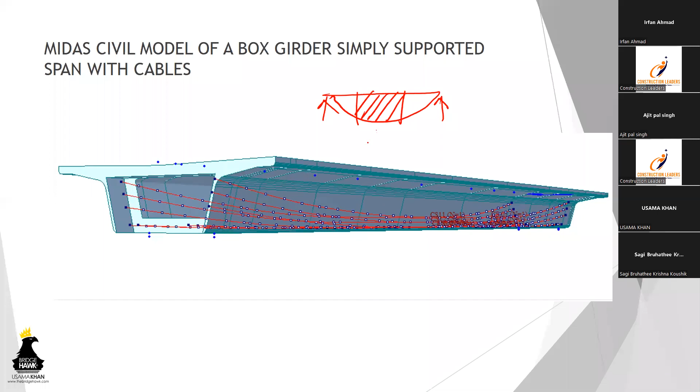If you're talking about a box girder, the main concern is that this simply supported structure needs to have its maximum bending moment countered by the cable profile. That is our main concern.

So the first thing is to know what is the bending moment. We'll calculate the loads and the load case, that's the first thing. Second, as per these loads, we'll have to create a certain cable profile, and have the post tensioning accordingly.

Loads are one thing you cannot change, so that will remain fixed. One of the main things we did was modify the cable profile. For example, if you've got a certain cable profile, certain moment follows - concrete grade is not much of a concern because the DBR already specifies that if you're doing a box girder, you need M60 or M50. So we don't play with the concrete grade, what we play with is mainly the cable profile.

They basically give you the grade prior to design - for example, that we are designing a box girder with a grade of M50, and then we design it accordingly. That is right, as I told you, we need material details, and the concrete grade has to be specified.

Even the steel grade has to be specified.

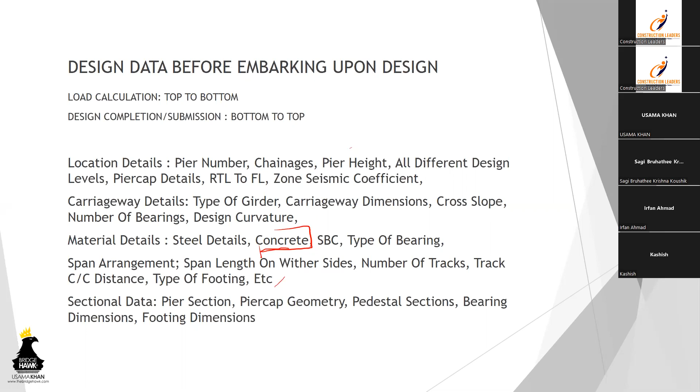Are you talking specifically about bridges or only structural design? Structural designing and bridges, sir.

BIM is building information modeling, and it has a very vast concern with structures. If you see Revit, we have a separate software we can directly import into, the Revit model can be directly imported to Autodesk Robot. Nowadays companies want engineers who can work on at least one BIM software, either Tekla or Revit.

In building information modeling, there's also something called bridge information modeling, that is BRIM. The softwares pioneering this BRIM cause are Midas Civil, SOFiSTiK, and Allplan. These three softwares are the go-to softwares for BRIM, that is bridge information modeling.

We have a big scope for that, and prestige projects usually done in Europe or the Middle East require BRIM engineers. It is not only sufficient to know STAAD Pro or softwares which are not linkable to BIM, they require Midas Civil and BRIM software. So yes, there is a very big scope for that.

Can you please repeat the BRIM software, I have to note it down. The first one you need to know is Midas Civil. The second one is SOFiSTiK. The third one is Allplan.